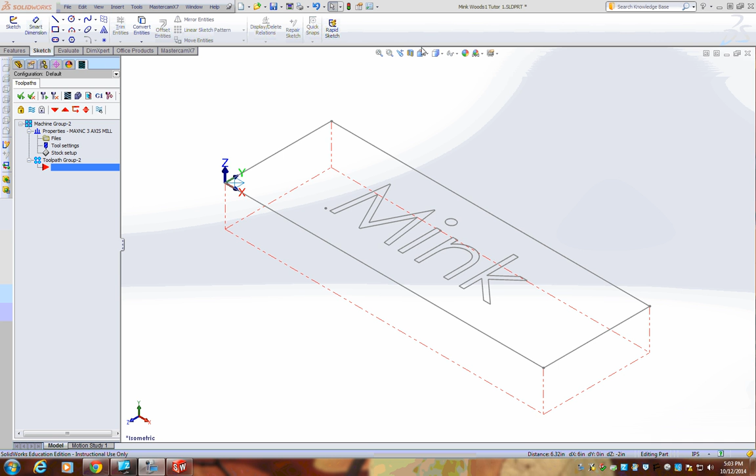Now that we have completed our housekeeping, it's time to put in some toolpaths so that we can get out to our machine. We're first going to go to our view orientation and go back to top view.

In our command manager, we're going to select the tab Mastercam X7 and select 2D toolpaths. These are going to be the only toolpaths that we learn during our CNC router lab. The rest of these icons will be in our metals manufacturing class. So if you'd like to learn that, please take my CNC machining course. The first one we're going to learn is the contour toolpaths.

It's asking for any lines that you need or want to be machined. Since we want all of them, we'll make it simple and go to this sketch icon. That way, when we hover over any of our lines, it'll highlight the entire sketch. Select both sketches and check mark. The NC name will more than likely be the same name as your file, and since we saved it already, it should be in there for you. Press check.

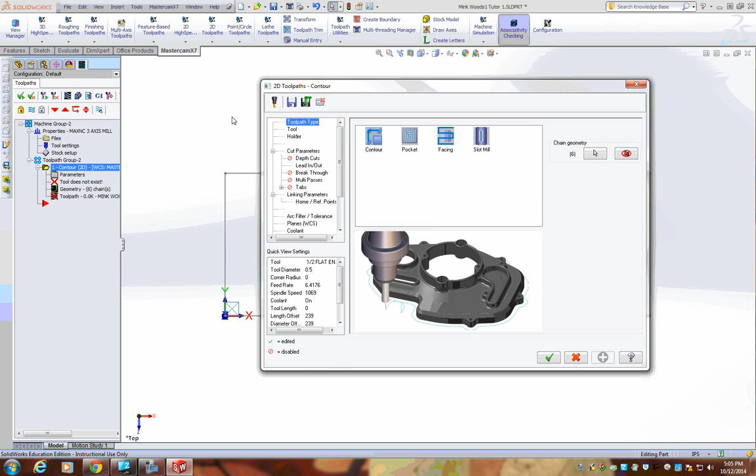In our contour machining table, there's one key thing you have to remember. This green check mark should not be touched until the end. Otherwise, you have to go back in and redo it. And I'll show you how to do that as we go along.

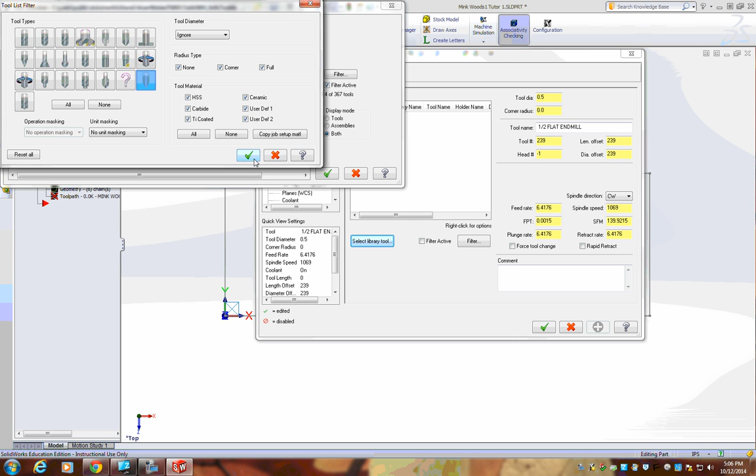Toolpath type: make sure contour is selected, as it is. Your tool is going to be an engraving tool bit, not a flat end mill. Go to Select Library Tool, Filter, and None. That will deselect everything here. Go to the Engrave tool and select that. Check mark. And now go to your 1/4 inch 60-degree engrave tool and check mark.

This is going to be tool number 1. It has no length offset and no diameter offset. Your spindle speed will be 10,000. Feed rate will be 40. And plunge rate is half of feed rate, so 20. Select Rapid Retract. In the comment area, please put your name,

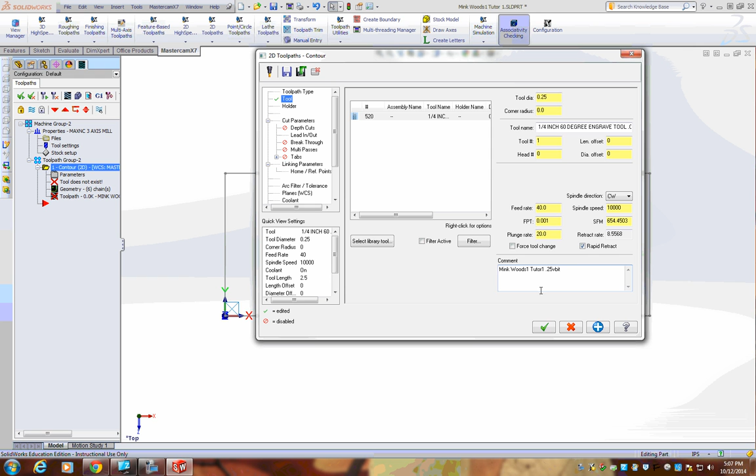what this is, and what bit you have. It can be called a V-bit, engraving tool, same thing. You don't have to worry about changing anything in the holder.

In the cut parameters, change the compensation type to off. This will make sure that the center of the bit follows the line instead of being on the left or the right side of the line.

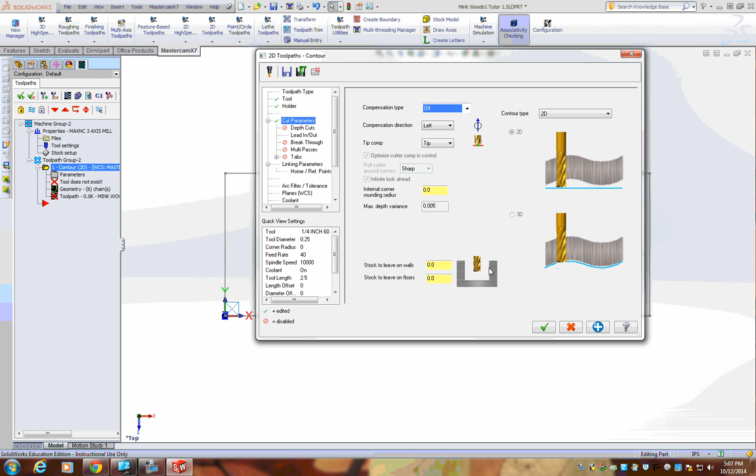Let's say at this time you forget and you press check. That doesn't really look right. Go back here to parameters and your window comes back up. No harm done. Go back to where you were.

And right now we're in depth cuts. Even though our bit is only going to go down 1/8 of an inch, I want to show you how to do this. Change your max rough step to 1/16 of an inch. This will make sure that you are able to take steps of cuts. If you take too much at one given time, you could ruin your material, the bit, or worse, the machine.

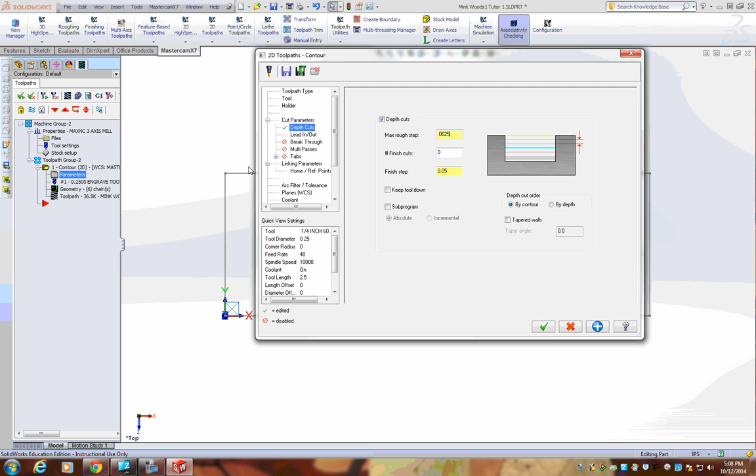On this cutter, you shouldn't take any more than 1/8 of an inch at a time. It's a fairly small cutter, so you need to take off small amounts. But for this one, it's only going to be 1/16, just to show you how. Lead in and lead out, we don't need for this operation. Breakthrough, multipass, and tabs we all do not need.

Go down to linking parameters. Select absolute for all of these. This will allow you to speak the same language throughout. Kind of like graphing on a graph paper, just like you did on your drawing. You want to make sure that the machine is speaking the same language with its math.

On the depth, we're going to put in a -1/8 of an inch. In our setup, we told our machine that our material was 3/4 of an inch thick, or 0.75, excuse me. But our zero was the surface of our material. So, in order for it to cut, it has to go below 0, or a negative. Click check mark.

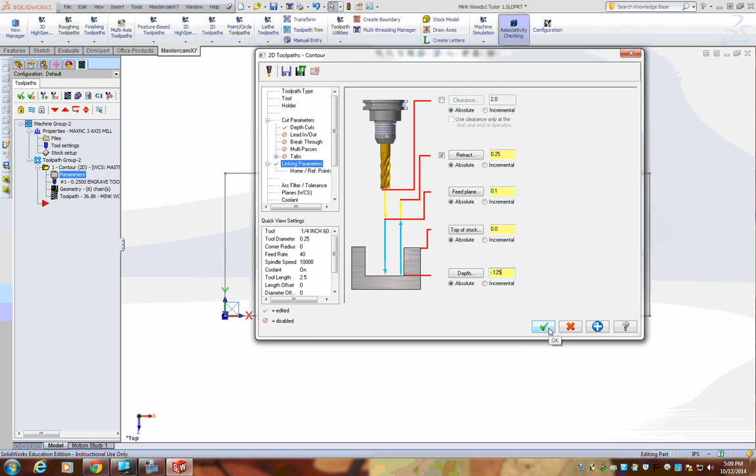Over here it says a red X. That's termed a dirty toolpath. To clean it up, just make sure this folder has a green check mark. Or, for safety's sake, green check mark with the play sign and the cutter with the play sign. We'll clean it up for you.

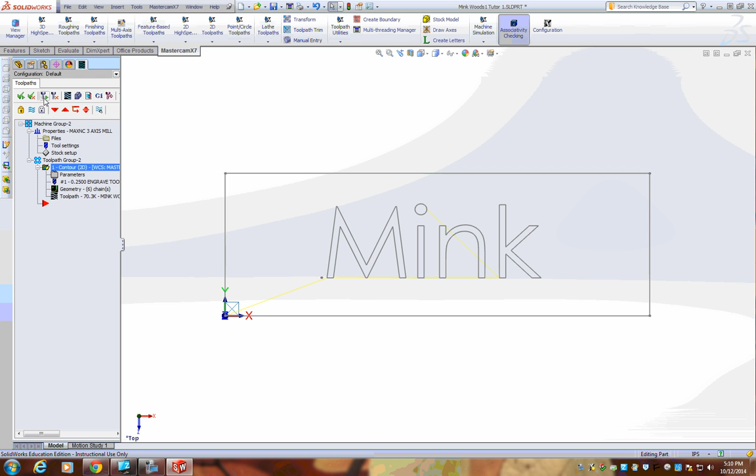You can now see some yellow lines. Those are transfer lines. Those lines tell you that a tool is moving across the material but not cutting. If you click your middle roller and move your mouse, you can see blue lines. Those lines tell you that some cutting is going to happen here. Now we want to save it to make sure everything stays the same.